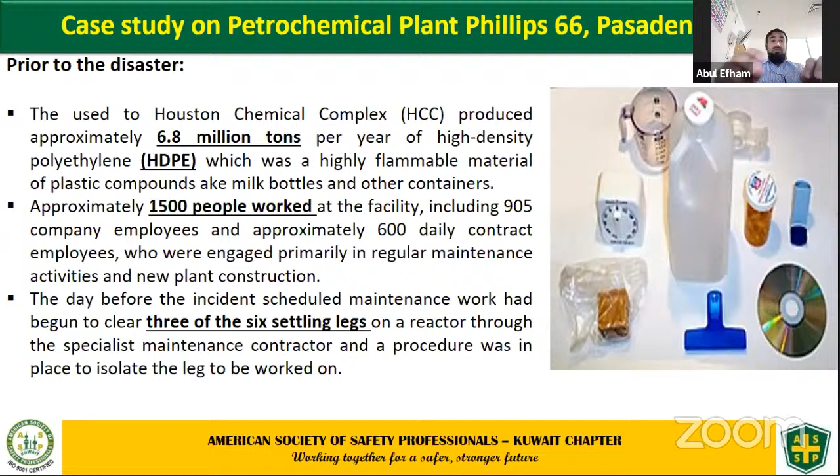So what is the accident summary?

The Phillips disaster was a catastrophic and devastating series of explosions and fires, and it occurred around 1 p.m. on 23rd of October 1989 at the chemical complex in Houston's Phillips 66 at Pasadena. Initially they experienced a chemical release on the polyethylene plant, and during the clearing of number 2 settling leg, part of the plug remained lodged in the pipework.

So a team member went to the control room for taking assistance, but unfortunately there was a leak, and that leak was a flammable vapor cloud that accumulated. Within 2 minutes later, the vapor cloud ignited with the contact of ignition sources, and that resulted in a massive vapor cloud explosion.

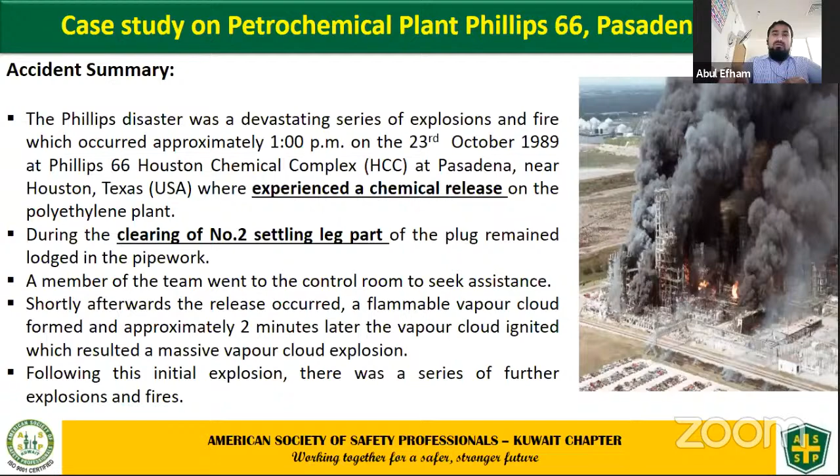After that, from this explosion there was a series of further fires and explosions in that plant and unit. So this was the summary of that incident.

So what is the consequences of these explosions? The consequences, what I have researched, is that there were about 23 fatalities due to this incident, and around 314 people were injured.

Billions of dollars worth of damage. In the last slide I have captured some of the values, what was the damage and what was the fines there. The massive vapor cloud explosion caused, after this series of explosions and fires, some fireballs to occur.

These fireballs could be seen more than 15 miles away from the origin of the incident. Also, the initial blast in the polyethylene unit registered 3.5 on the Richter scale, and it could be seen that it was a very disastrous, very devastating stage.

The plant lost communications and much of its vast water systems, and the building housing the emergency operation centers and emergency plans was wrecked in the explosion.

Unfortunately, there was also one big issue: to control this incident's occurrence, it took 10 hours to bring under control. Around 39 tons of highly flammable gases were released through this.

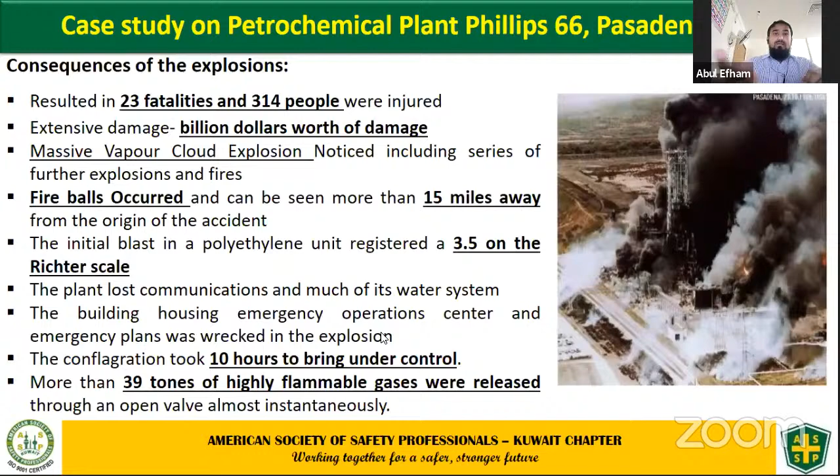So what went wrong in this incident?

Basically, the incident resulted in a release of extremely flammable process gas, because in this process to produce the polyethylene product, there was use of byproduct raw materials like ethylene, isobutane, hydrogen, and others to make this product.

So there were many raw materials around as storage and others, and there was some contact with ignition sources also. That's why suddenly the vapor cloud accumulated, and on contact the incident occurred.

Unfortunately, it happened during the maintenance operations because of the stoppage or blockage of this product, polyethylene, in the reactor.

The evidence shows that more than 85,000 pounds of highly flammable gases were released through an open valve, and a vapor cloud formed and traveled rapidly through the polyethylene plant. It took only 90 to 120 seconds.

With an ignition source, it exploded with the force of 2.4 tons of TNT.

TNT is nothing but trinitrotoluene. After an extensive investigation, OSHA found that the safety valves, one for closing and one for opening, had been reversed and therefore did not function properly.

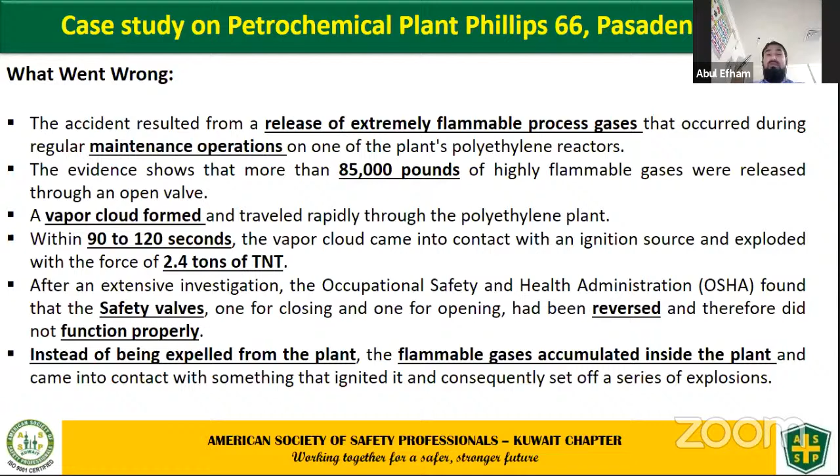So instead of being expelled from the plant, the flammable gases accumulated inside the plant and came into contact with something that ignited, consequently setting off a series of explosions. So this was, we can say, the phase of how it went wrong.

So what was the finding? OSHA and other sources, I have captured some of the findings. It is concluded that there were a number of major issues.

For example, there was a lack of process hazard analysis, inadequate standard operating procedures that were not as per the standard, and also no fail-safe block valve was installed, which still shows the dangerous situation in case of an emergency.

Inadequate maintenance permitting system was there, by the contractor, subcontractor, or even company members. Inadequate lockout and tagout procedures were followed, and there was a lack of combustible gas detection and alarm systems, with failure of detection systems and poor maintenance of those detection and alarm systems.

Also, there was the presence of ignition sources, inadequate ventilation systems, fire protection systems not maintained well, and a number of company audits were ignored.

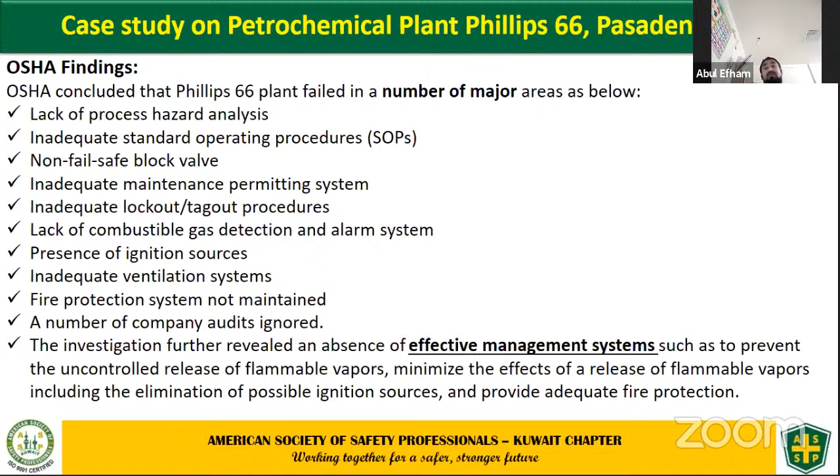It was revealed that there were internal audits by the safety team members which were ignored and not rectified as per requirement. There was also an issue of absence of effective management systems. The management holds the leading position and needs to take action on time once there are gaps in the organization. Due to the absence of effective management systems, an uncontrolled release of flammable vapor occurred, and efforts to minimize the effect of the release were insufficient.

As a technical measure, there was some loophole. It was noticed that a single isolating valve was open at the time of release, and the air hoses to valves were to be disconnected prior to maintenance, but this was not carried out. Also, the site held a large inventory of flammable materials.

This large inventory of flammable material was stored in the plant area, and no safety measures had been taken to avoid contact with ignition sources. The ventilation intakes of the building close to or downwind of the process plant were not arranged so as to prevent the intake of gas in the event of a release.

Many staff or employees experienced engulfment due to the release of gases, and they died. An effective permit system was also lacking, both by the company members and the contractor, and there was no dedicated fire water system, as there was an issue that was not settled.

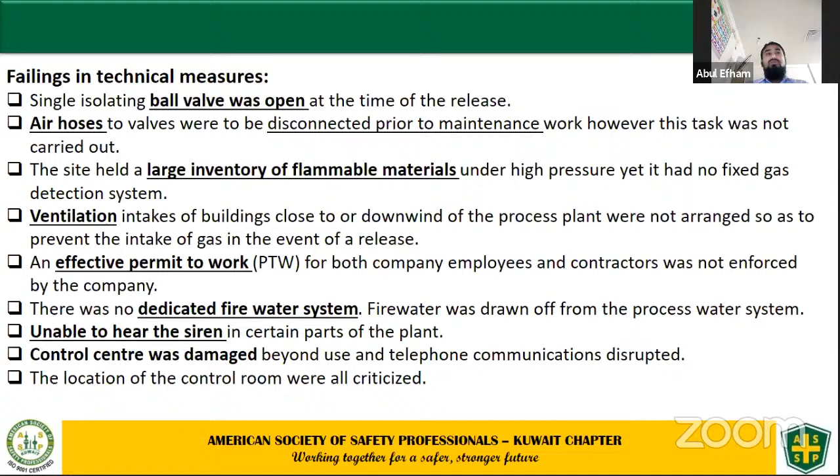So these were the technical measures that were captured after the incident. This was a very devastating incident and could have been catastrophic. So there were some penalties imposed by the regulatory bodies.

For the willful violation of the Occupational Safety and Health Act general duty clause, a penalty of approximately 5,660 thousand dollars was given by the authority to the industry.

Citations were issued for serious violations in the areas of emergency response, inadequate pre-emergency planning, plant alarm systems, hazard communication, and respiratory protection, around 6,200. Also, the contractor, Fish Engineering Construction Company, was penalized for violation of permit systems, around 724,000 dollars, and for inadequate respiratory protection and deficiency in hazard communication, around 5,500 dollars.

And for recordkeeping issues, 100 dollars. So these were the penalties. You can assume how, if there is a lack of safety measures, how many issues could occur, and how much loss there is in terms of people, property, and money.

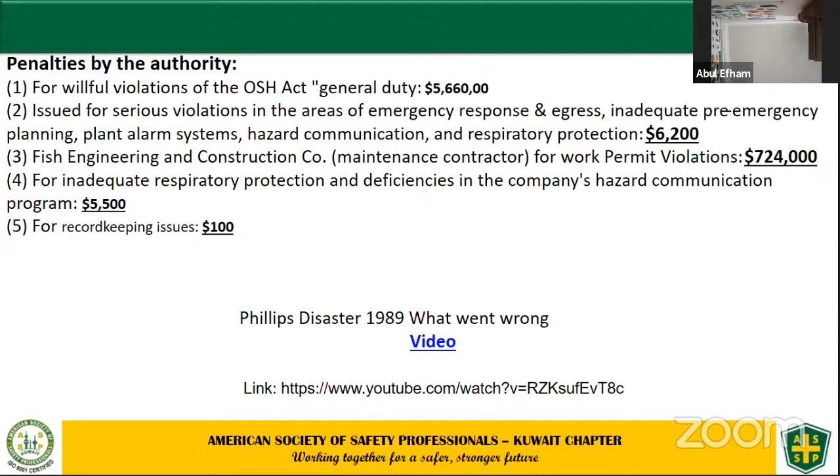There is one short video I would like to share with you, just a minute, and it is a very good video which can show how this happened. This video will tell you how this happened and what the mechanism was in the plant.

89, Pasadena, Texas. An explosion could be heard from miles from its origin, and the resulting fireball could be seen from more than 15 miles away. Today we'll be looking at the famous Phillips disaster and take a look at the engineering and what went wrong in the process. I'm your host Akshay Kurwa, and let's begin.

Fire and subsequent blast originated at the Phillips Petroleum Company's Houston Chemical Complex facility, and the initial blast registered 3.5 on the Richter scale, and the conflagration took 10 hours to bring under control. The explosion killed 23 employees and injured 314 others. The plant produced approximately 6.8 million tons per year of high-density polyethylene, a plastic material used to make milk bottles and other containers.

The HDPE production was done using a process circulated through an arrangement of 30-inch diameter pipe mounted vertically in 150-feet-tall continuous ring-like structures called loop reactors. The loop reactors contained a catalytic reaction that produced HDPE, and the raw materials were ethylene and isobutane as a diluent. Hydrogen and hexene were also added to achieve target product quality specifications.

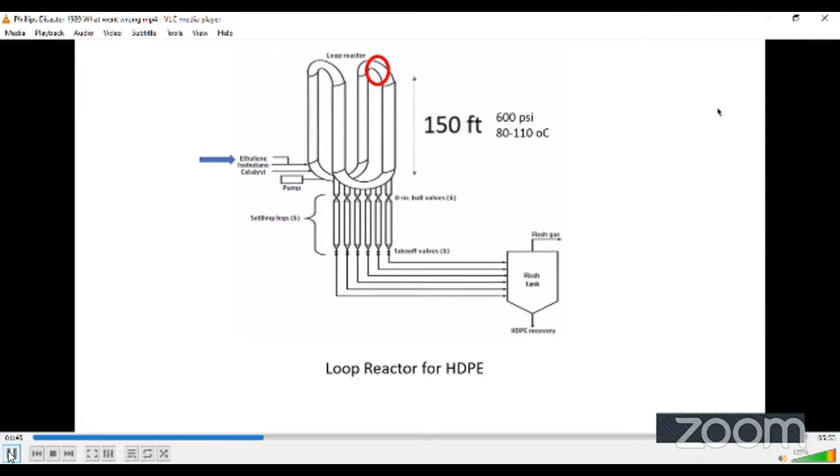Six settling legs were located at the bottom of each loop reactor. Each settling leg consisted of a flanged 8-inch diameter pipe connected to a pneumatically controlled 8-inch diameter ball valve.

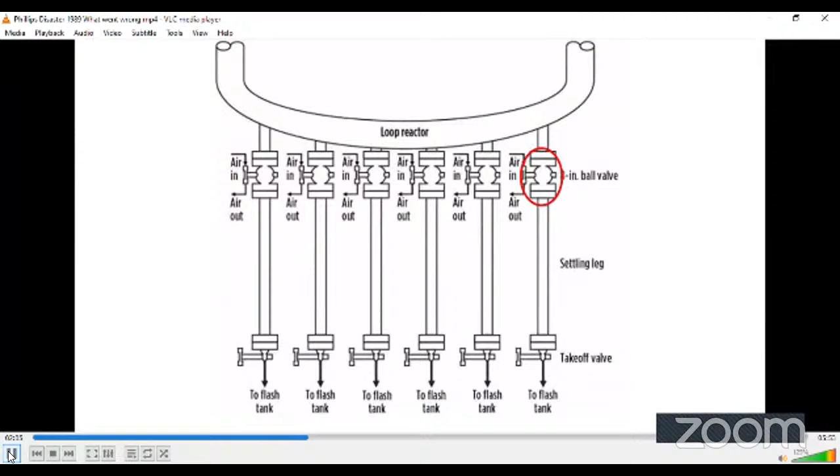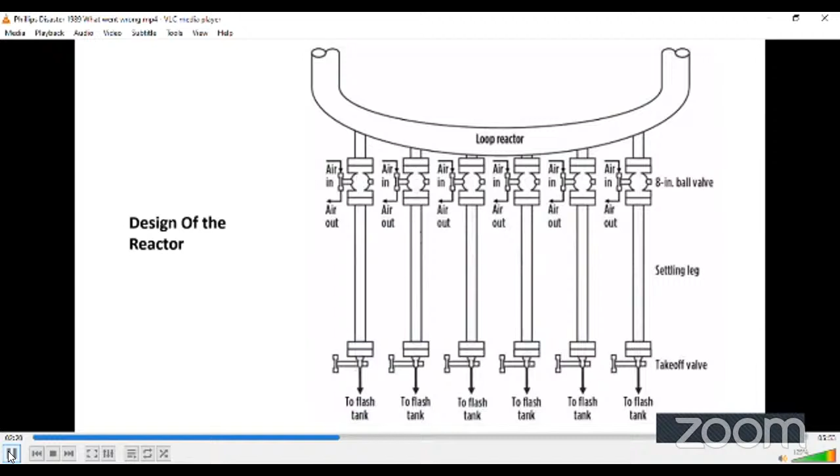Beyond the ball valve was an 8-foot length of straight pipe where the reaction product, polyethylene fluff, was collected. By design, the fluff was expected to move freely through the settling leg from the loop reactor to the flash tank, but in reality it tended to collect inside the settling leg.

The accumulation of fluff would develop into a large cylindrical log inside the settling leg. Eventually, the log would become large enough to interrupt product transfer between the loop reactor and the flash tank.

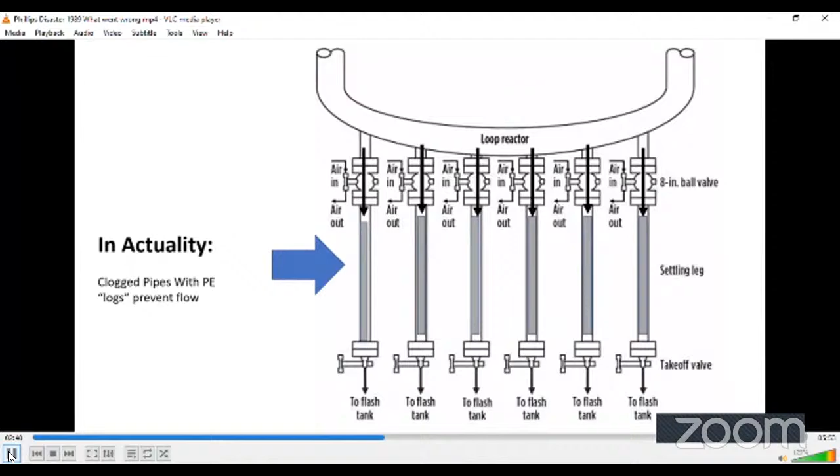Since production would cease if all six settling legs got plugged with these logs, invasive and routine maintenance was required to remove the logs from the settling legs.

The settling leg maintenance was performed while the plant was actually running at normal temperature and pressure. So it was critical to isolate these settling legs in order to perform maintenance safely.

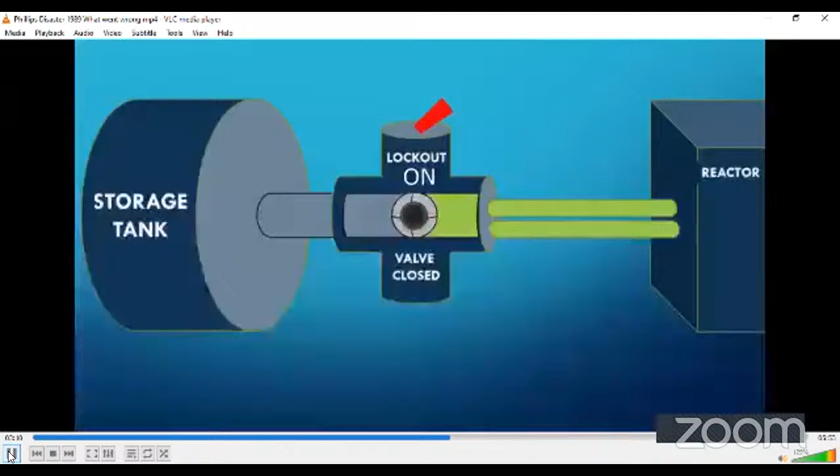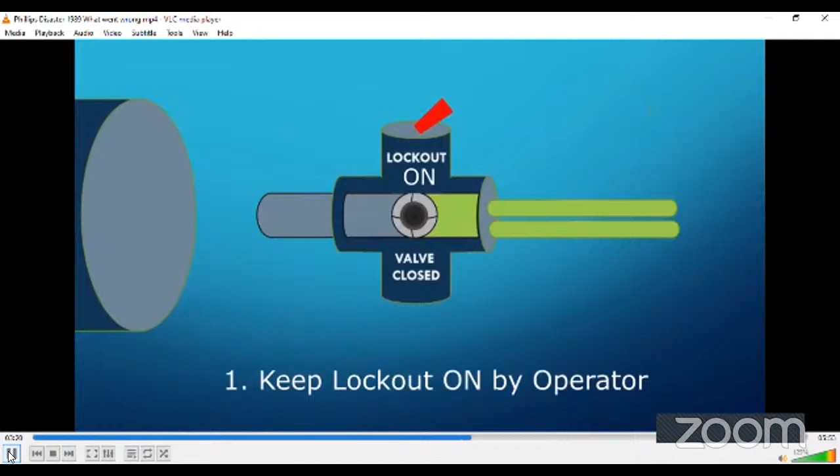The nominal procedure for closing the 8-inch ball valves was to lock them closed and disconnect the actuator air hoses. Then the operators would contact the maintenance contractor to remove the polyethylene logs from each of the plugged settling legs.

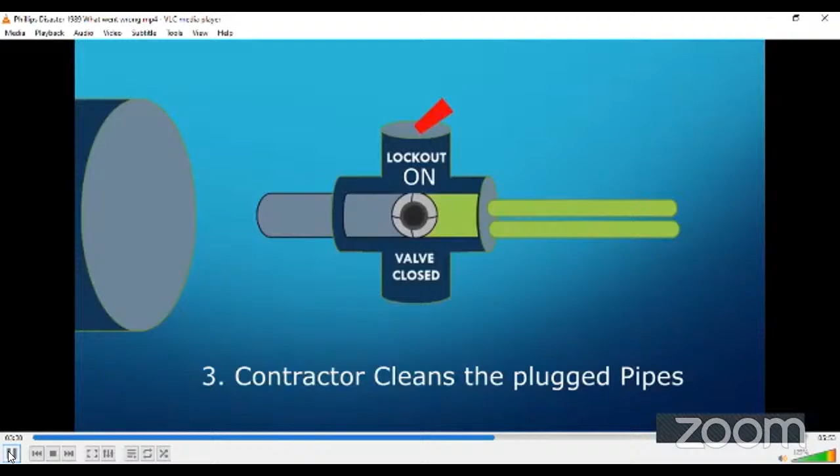On the fateful day, the reactor lost its entire contents of more than 40 tons of highly flammable process material almost instantaneously. Within the next 2 minutes, the flammable vapor cloud ignited and exploded shortly after 1 p.m. local time, with a force equivalent to 2.4 tons of TNT, registering a 3.5 magnitude earthquake on the Richter scale.

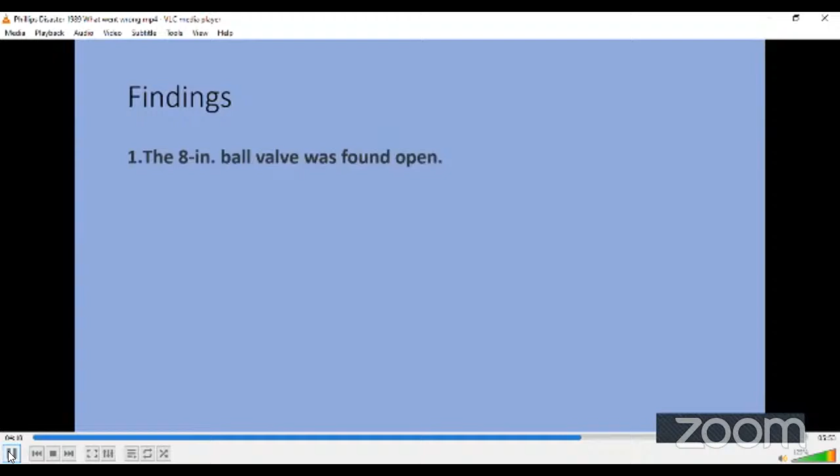The US Department of Labor's Occupational Safety and Health Administration, OSHA, was asked to conduct an investigation. The findings were that the 8-inch ball valve was found open, the manual lock was removed from the valve stem, and the actuator hoses were found reconnected, not disconnected as required by the local site's alternative maintenance procedure.

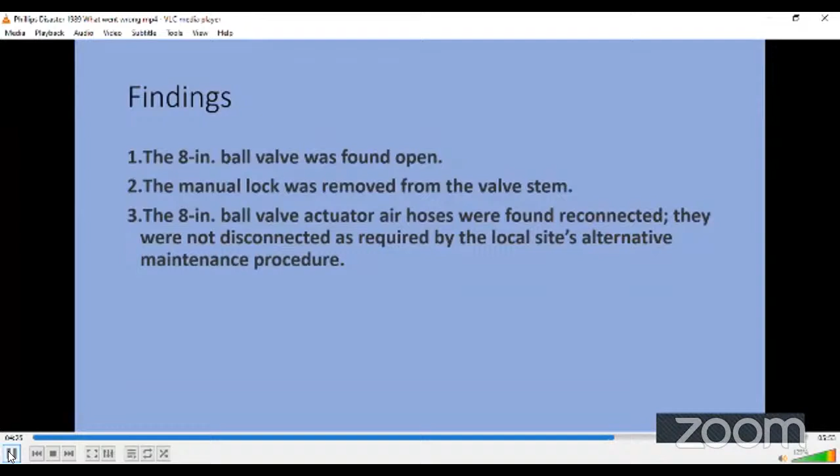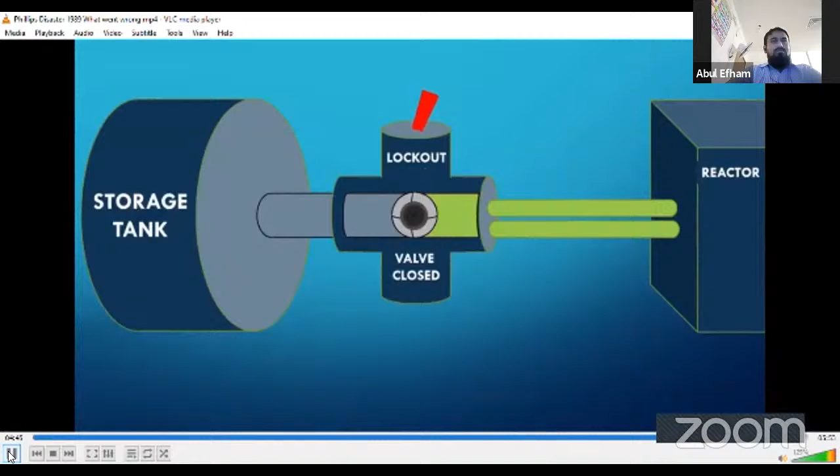It is unfortunate that OSHA was not able to derive the specific sequence of events that led to the disaster. This is understandable since no one in direct contact with the equipment that led to the release survived the explosion. However, investigation reports suggest the following sequence occurred prior to the disaster.

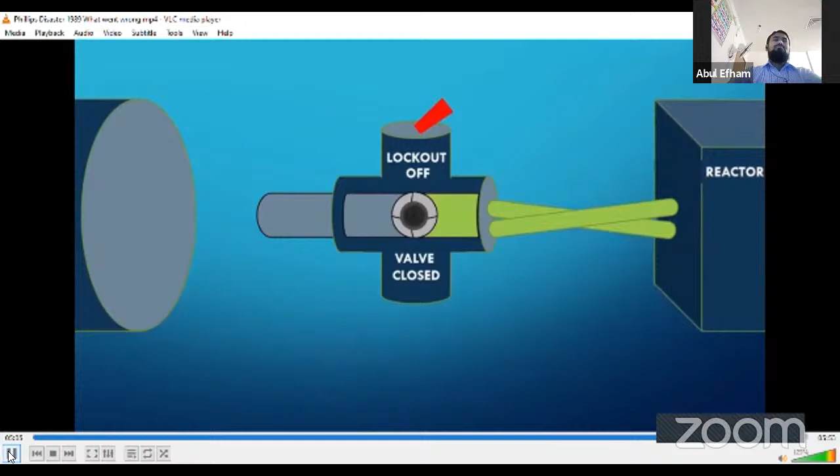First, the ball valves were not locked closed while disconnecting the settling legs, and poorly trained workers switched the actuator hoses. This incorrect actuator hose configuration would open the 8-inch ball valve while the actuator switch showed the valve to be closed. This led to a large leakage of highly flammable liquid into the atmosphere, which eventually found a spark source and led to catastrophe.

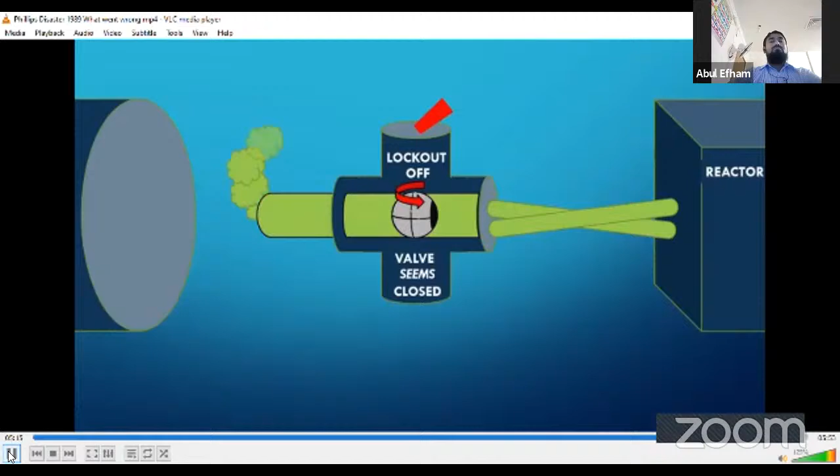Additionally, there were no warning systems in place to give notice of the impending disaster. In addition to the priceless lives lost, the company and its contractor, Fish Engineering, faced several fines and lawsuits, which could have all been avoided if adequate worker training was provided.

Well, I hope you guys learned one lesson from the case.

So this was the video, which gave you some information about how, due to lack of process safety, these incidents happen. I hope I gave you some useful information, as it is just a brief overview. In detail it can be found in many resources, or if I missed something, sir or other colleagues will cover it.

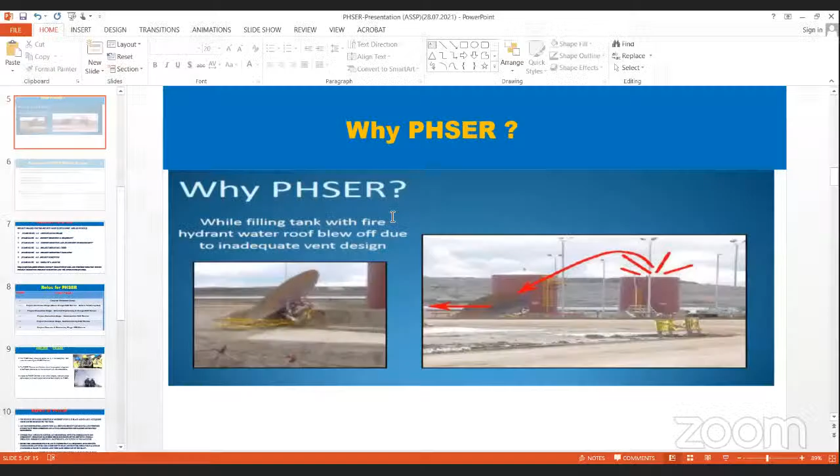Today I'm going to talk about project health, safety, environmental review, shortly we call PHSER. What is the PHSER process? The PHSER process is not a risk management tool like HAZID, HAZOP, QRA, or SIL, but rather it is a qualitative audit of the project's HSE plans and actions. It does review an established project's HSE plan and action. This process is meant to be protective, not policing, and improvement is what is aimed at. This is the basic purpose of the PHSER process.

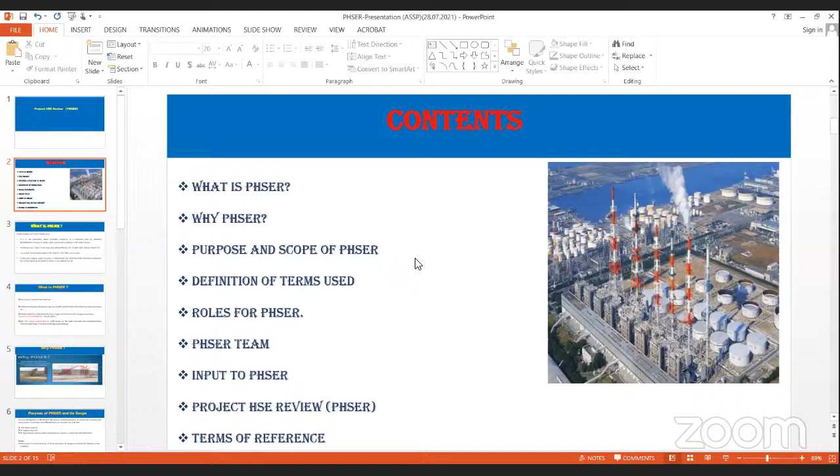Now I will go to the second slide. Are you able to see my slide? Yes, it's clear. Okay, just put it in slideshow mode. Pardon? Slideshow mode. More, preview mode, like you can say. Okay, it's okay now.

Now what are the contents in this PHSER presentation? What is PHSER and why it is done? What is the purpose and scope of PHSER? What are the definitions of terms used and roles for PHSER, and the PHSER team, those who are involved as members, and what are the inputs to the PHSER, the project HSE health safety review, and what is the terms of reference. These are the contents we are going to discuss in this presentation.

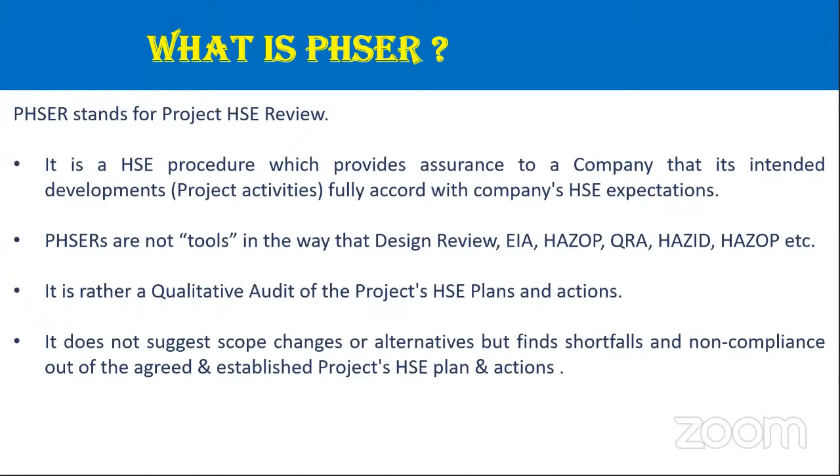Now, PHSER stands for Project Health Safety Environment Review. It is an HSE procedure which provides assurance to the company that project activities fully accord with the company's HSE expectations. PHSER is not a tool in the way that design review, environmental impact assessment, hazard and operability studies, quantitative risk assessment studies, and hazard identification studies are. It is rather a qualitative audit of the project's HSE plans and actions. It doesn't suggest scope changes or alternatives, but finds shortfalls against the agreed and established project's HSE health plans and actions.

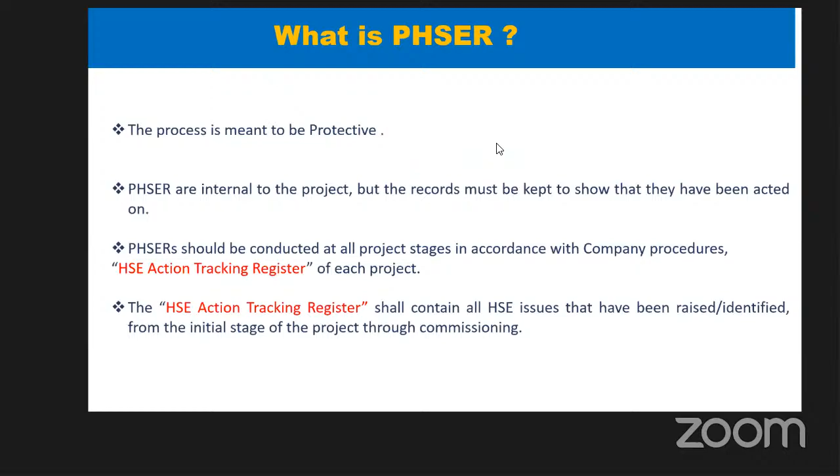Now, this PHSER process is meant to be protective, and PHSERs are internal to the project, but records must be kept to show that they are being maintained properly - the records are in the system. The PHSER should be conducted at all project stages in accordance with company procedures, like the HSE action tracking registers of each project. The HSE action tracking register or hazard register contains all HSE issues that have been raised from the initial stages of the project, from the concept selection to the commissioning stage.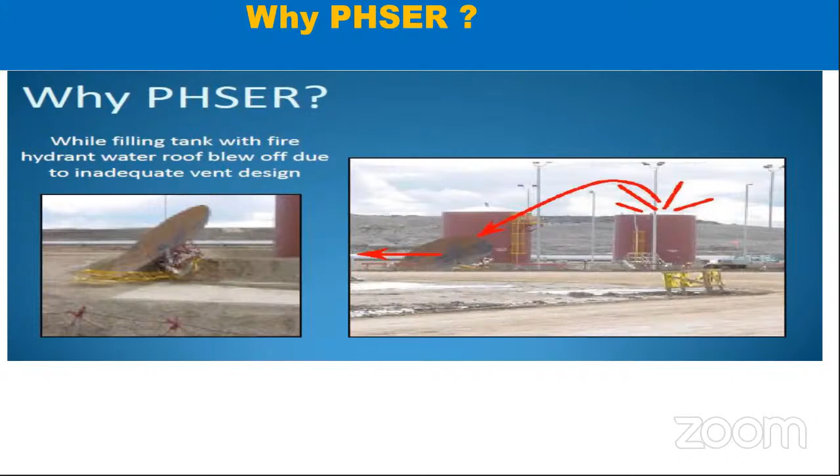The overall objective of the project HSE review process is to assure that HSE sensitive areas have been identified in a systematic way, and that whatever is involved in the major projects, its engineering and operational systems will be developed to control and manage the identified risk. The scope of the PHSER will cover all technical aspects of the project within the facilities of the company.

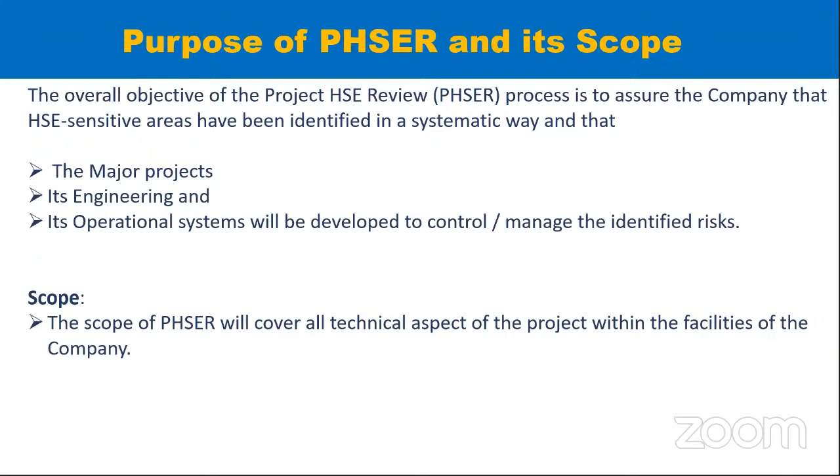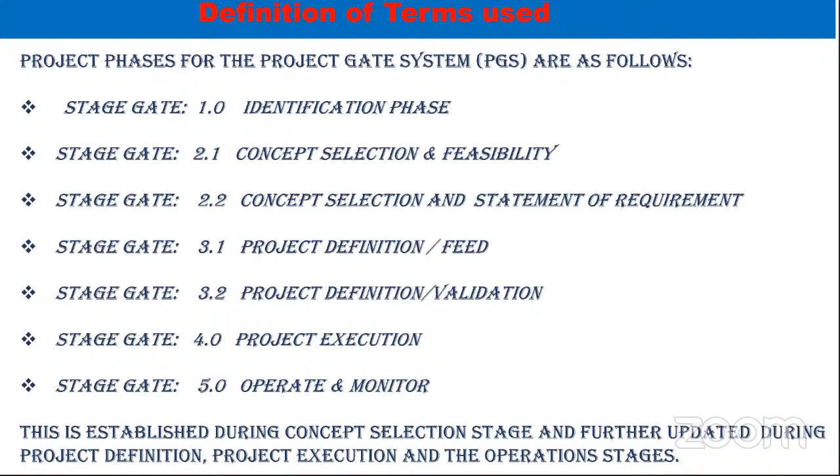The project phases for this review will be in different stages. Stage 1 is called the identification phase, stage 2.1 is concept selection and feasibility, stage 2.2 is concept selection and statement of requirements, stage gate 3.1 is project definition, meaning the FEED stage, then gate 3.2 is the project definition or validation stage. Gate 4 is the project execution stage, and stage 5 is the operation and monitoring stage. These are the stages we will see one by one.

What is the concept selection stage? These are the different stages of the phased projects. First we have the concept selection stage, which we call phase 1. In phase 2, this is carried out in the project definition stage.

That means it is before tendering any project. Then phase 3 will be carried out during the detailed engineering and design HSE review. Phase 4 will be reviewed during the construction review, that is the execution stage. Phase 5 review will be carried out during pre-commissioning and commissioning stage, also part of the execution stage. Then phase 6 will be carried out during the project operation stage, and after operation there will be a monitoring stage.

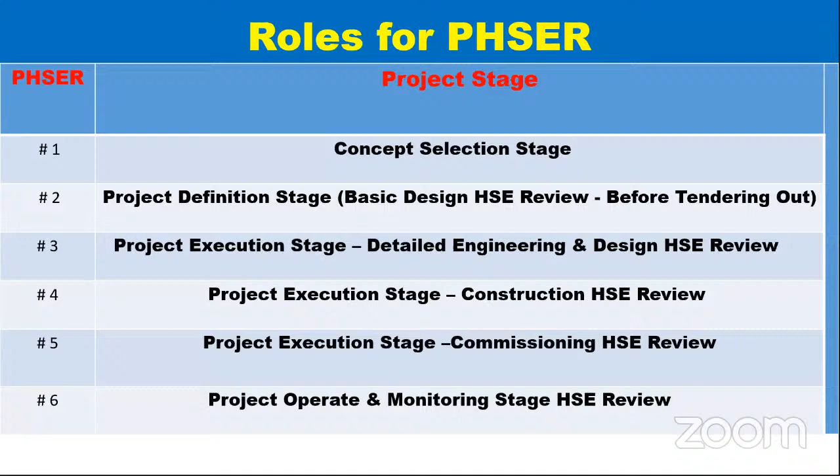This will be carried out at different stages, at different phase levels. For conducting any PHSER review, it is not a single person's team - it shall be conducted by a multidisciplinary team under the leadership of the PHSER chairman. The PHSER chairman and members should be completely independent of the project under review, but having relevant skills and competencies. In case the PHSER chairman is from the same company, such a person cannot belong to the same asset or same department as the team initiating the PHSER.

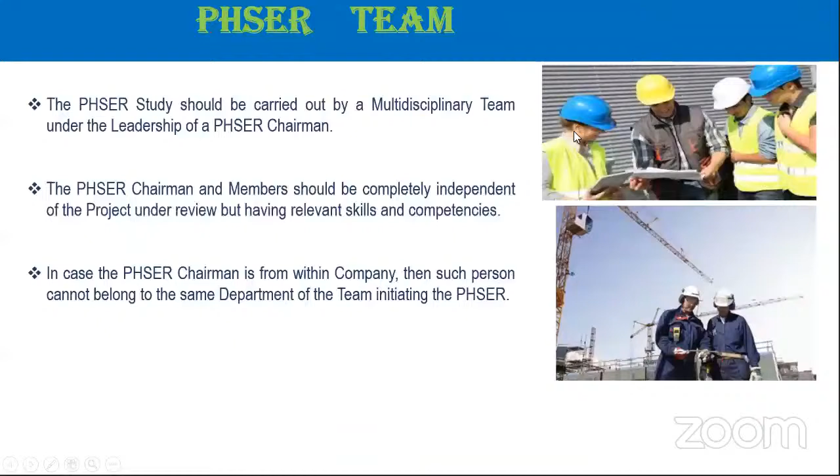Then this PHSER, the project HSE review - the projects from the HSE point of view are reviewed at each stage in the respective project phase development. In total, there can be 6 project HSE reviews for the project across different stages and phases of the project.

The key objectives of the project HSE review exercise are as follows: to ensure HSE management systems, elements and procedures are implemented and effectively complied with. Then the project list of specifications, codes, standards are appropriately validated and, wherever applicable, compatible with the existing facilities. This PHSER is also to verify that the design is being developed within these specifications, codes and standards.

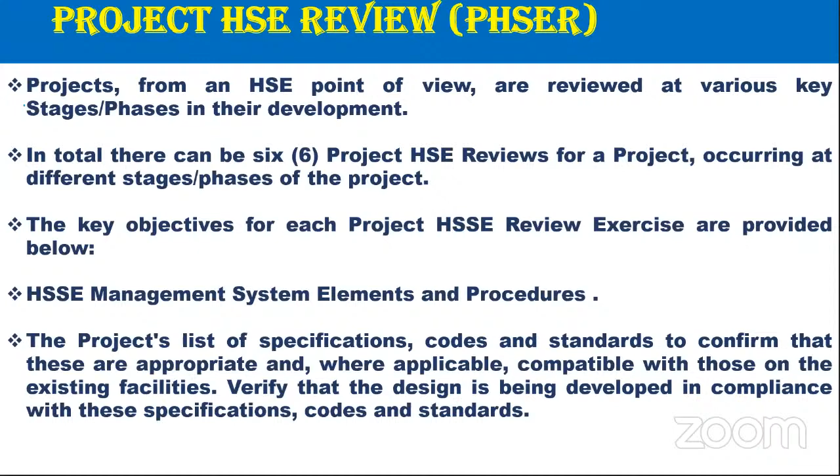The project HSE review depends upon the stage of the project and different phases. There is a typical list of documents to be reviewed at each stage of the phase review. For example, HSSE plan, HSSE studies, reports such as HAZID study, HAZOP study, quantitative risk assessment study, environmental impact assessment study, safety integrity level - all are covered in each respective PHSER study.

Previous PHSER reports and the status of action items also need to be covered at the next stage of the PHSER study. Any design change procedures, quality audit reports, pre-commissioning and commissioning procedures that are approved, and emergency response plans, if available, should all be reviewed during each stage of the project health, safety and environment review.

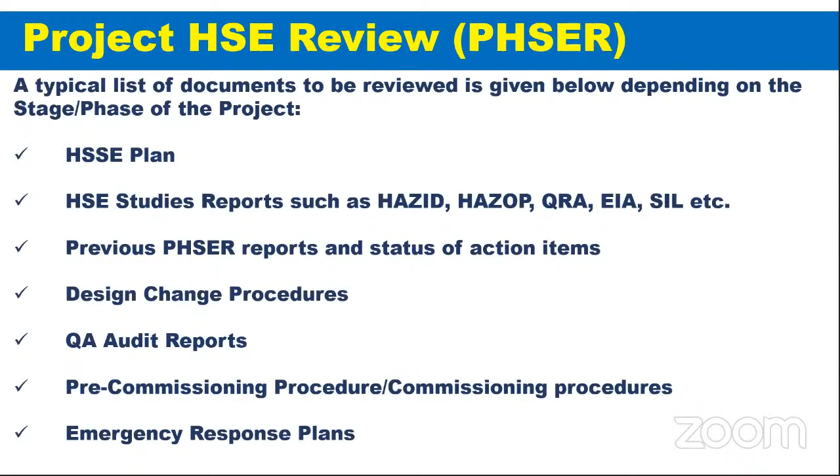Each PHSER exercise will review the immediate PHSER report as well as the status of the recommendations from the earlier phase. The objective is to verify the status of implementation of the recommendations. The project team shall ensure that all documents and drawings mentioned in the immediate previous PHSER report are made available to the PHSER team well before commencement of the review for verification.

Regarding terms of reference - the review will be undertaken based on agreed terms of reference, which will define the scope of the activity, scope of work, time scale, who are the members to participate, the previous HSE studies, report recommendations, and the previous PHSER reports. All of this will be reviewed at each stage of the HSE review. Now, what are the advantages of the PHSER review?

It gives an understanding of the methodologies employed. It is a structured approach to examining the HSE risk. It is an audit of the project procedures and their implementation to ensure compliance with standards and legislations.

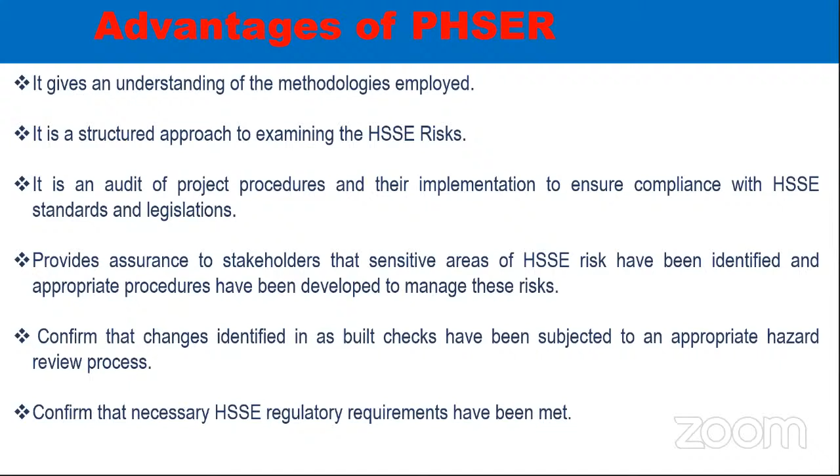The PHSER will provide assurance to the stakeholders that sensitive areas of HSSE have been covered and appropriate procedures have been developed to manage these risks. PHSER confirms that changes identified in the as-built checks have been subjected to appropriate review processes, and confirms that necessary health, safety, security, environment regulatory requirements have been met.

These are the basic ideas of the project health safety environment review, but each project health safety review will have different objectives. For each objective, whether each phase status, all the recommendations have been implemented and documented, has been verified. This is like a qualitative audit. This much is only a very basic presentation on the project health safety environment review. Thank you, sir.